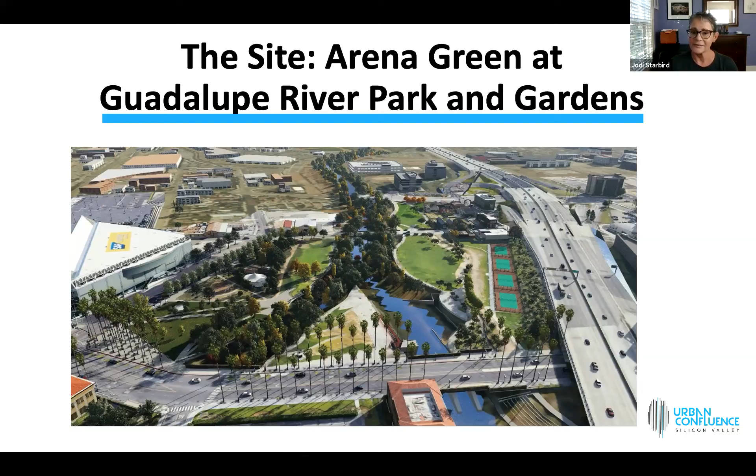As indicated here, I'm a co-founder and the board chair of the nonprofit, the San Jose Light Tower Corporation, and the Urban Confluence Silicon Valley project is a project of the nonprofit. As many of you know, we formed the nonprofit about 4 years ago. The third co-founder, Tom Woolman, is on the call. Glad to see you signed in, Tom. Steve Borkenhagen and I were the 3 co-founders, and then Christine came on board a couple of years ago.

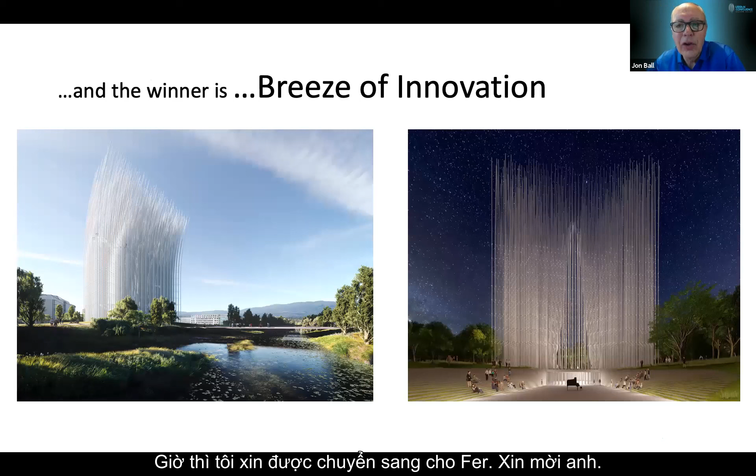So I'm going to turn it over to Fer. Fer, it's all yours. Thank you, Jon.

We are very, very happy to be in this position. We are very thankful to the organization, and thank you to the jury. It's been a long process, over a year. I'm going to introduce ourselves, our office, and then I will introduce my colleagues, Eddie Hall and Ron Klemenschik, from our executive architect and the structural engineers.

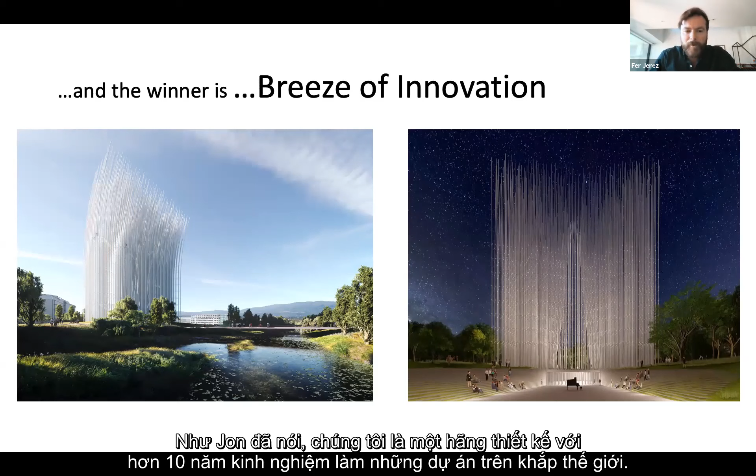As Jon has said, we are a firm with more than 10 years of experience doing projects around the world. As you can see here, we are originally from Spain. We have a few projects in Europe, we are now in Australia, and we also are working mainly in the north of Europe. So we are used to working in different climate conditions and being very sensitive with the environment.

So we are a young office, but we have experience working around the world and working remotely. As you can see, these are some of the projects we've been involved in over the last 10, 12 years. Most of these projects have been public projects, cultural venues, museums, and iconic structures, and all of them are driven by our optimism and by innovation. Why optimism? Because we think a better world is possible, and we try to use every opportunity we have for every project in any city in the world to achieve that.

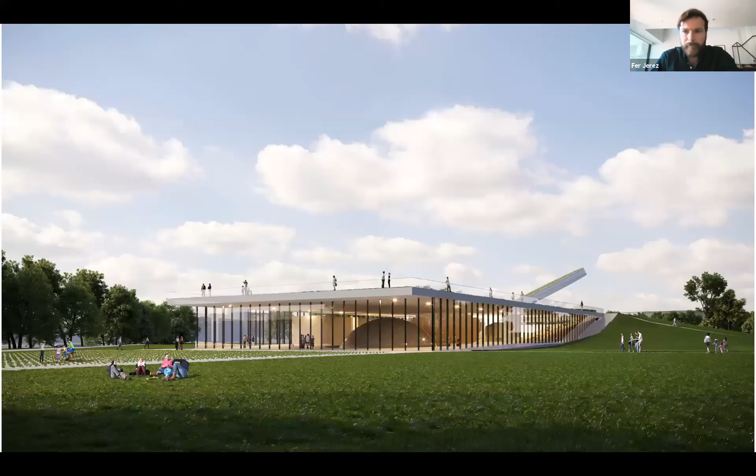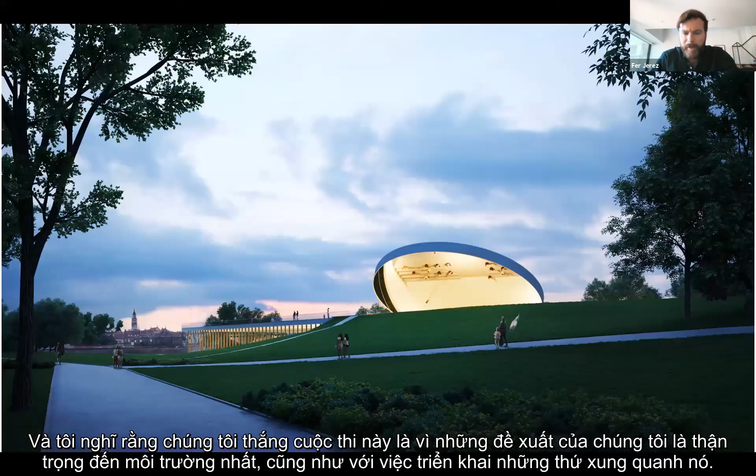This is one of the last projects we are doing that is now under construction. I'm showing this because the site is very similar to the Arena Green Park in San Jose. This is in the north of Europe. It's a park, it's a public project, it's a museum. I think we won the competition because our proposal was the most sensitive with the environment, as well as activating the context around us. As you can see, it's the old city in the background. It's a public park and an iconic structure.

In this project, we were using the same tools, similar tools, even though the project is completely different from the one we used in the Breeze of Innovation—creating an iconic structure, a landmark visible from the context, able to attract visitors, but also very sensitive with the environment and the ecosystems of the park, and able to activate the park around it. A project that is able to transform a park in a positive way, but also attract visitors from all over the country in this case.

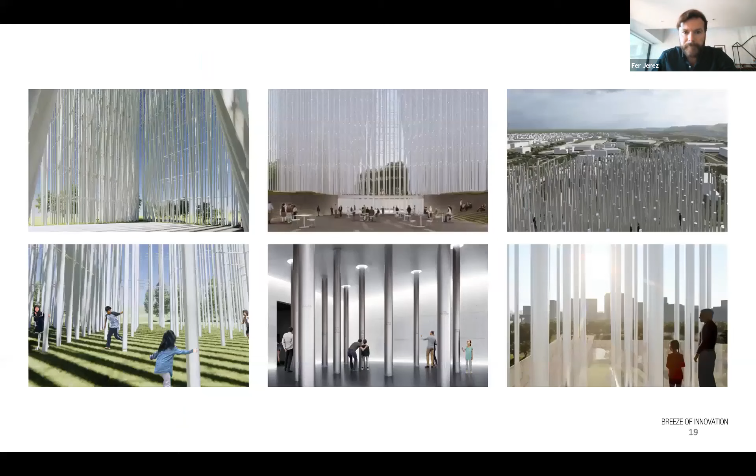So, why have we chosen to design this project? The main driver of this project has been people. We had 3 elements to play with in this project.

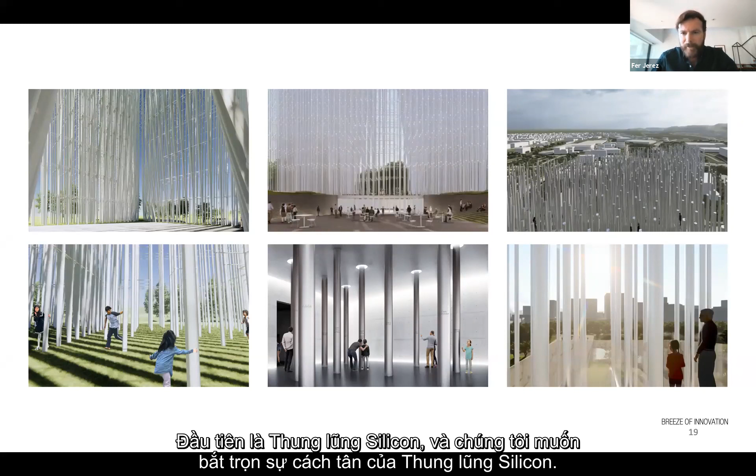The first one was Silicon Valley, and we tried to capture Silicon Valley innovation. The second one was San Jose, the city, how to engage with the community of San Jose. And the third one was the park, the environment, how to create something that sits in the park, but is almost like a forest, like it belongs to the park, not an artificial structure superimposed on the park that is totally different in shape and form from nature.

That's the reason we chose these rods, these vertical elements, with the idea that they can merge with the forest, merge with the trees, and allow children and families to enjoy the space at every time. As you can see, we have different spaces here that can be enjoyed at different times of the day.

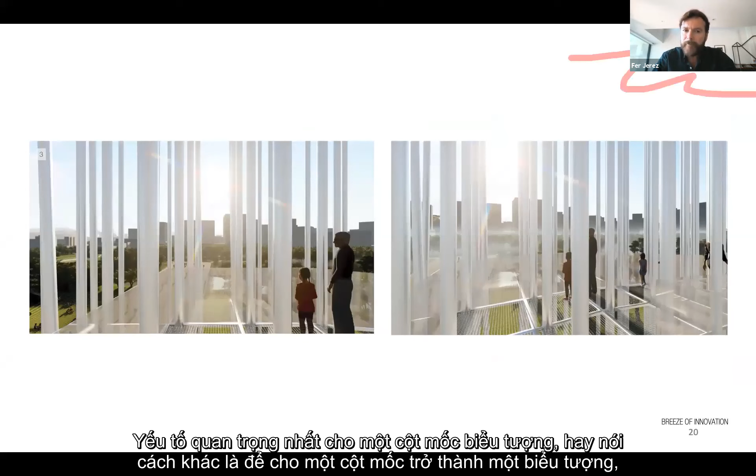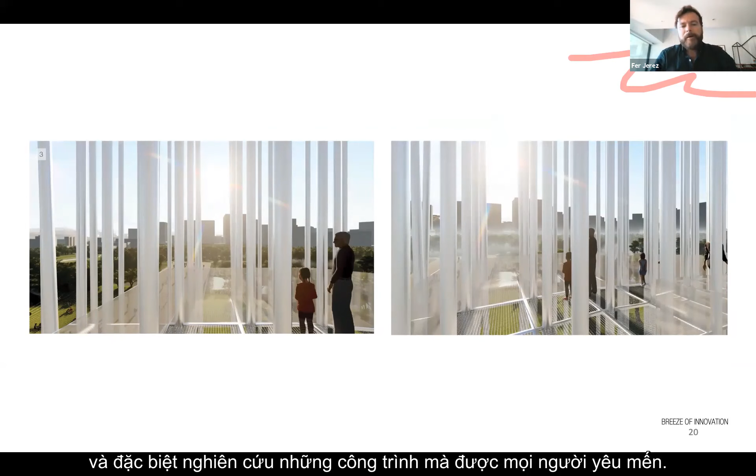But the most important element for a landmark to be truly iconic is to provide an experience that cannot be found anywhere else in the world. We've been researching a lot of iconic landmarks around the world and studied especially the ones that are really loved by people. We think that the fact that this structure will move with the breeze engages with a unique experience for people, because it will be the first time you will be able to ascend in a structure that is moving.

People will be completely safe because we have created platforms that are fixed in a fixed structure, but around them, thanks to our structural engineers, we allow the structure to move with the breeze. And more importantly, this movement will create energy.

We think this is a very important fact, because we are in the 21st century. We are all aware of climate change, we are all aware that the valley is warming up, and what better way to bring a bit of breeze as clean energy. Next, please.

Once you get to the top, this is the viewing platform, you will see this landscape of light, which in a way summarizes the concept of the project. The breeze will move these rods, and with the movement of the rods, the tip of the rods will light up, and that instant creation of clean energy we think is a very important statement for our planet.

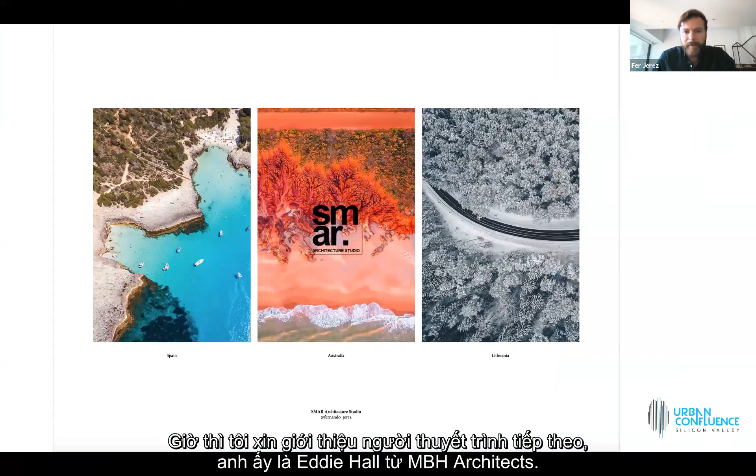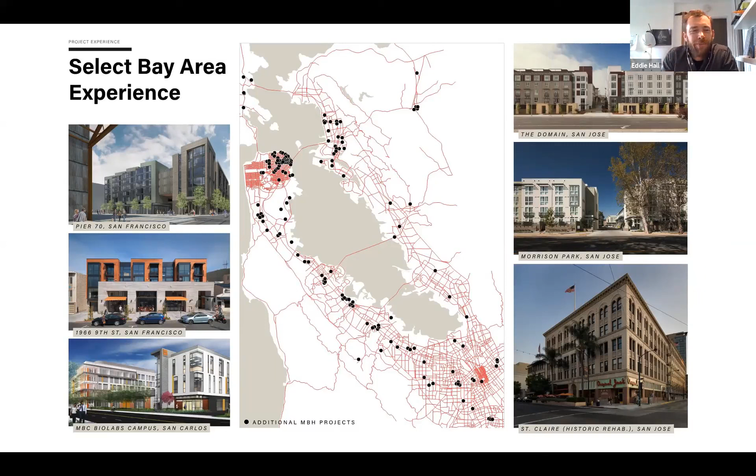Pier 70 is multifamily housing that we're currently doing, that's under construction. 1966 9th Street was recently completed, that's a multifunction building. And MBC Biolabs, we recently completed phase 1 in San Carlos that we're extremely proud of. They have since gone on to move on with and participate in COVID testing. So that really warmed our heart, as we work on projects that leave the world better than when we found it. And let's go to next slide, please, Mike.

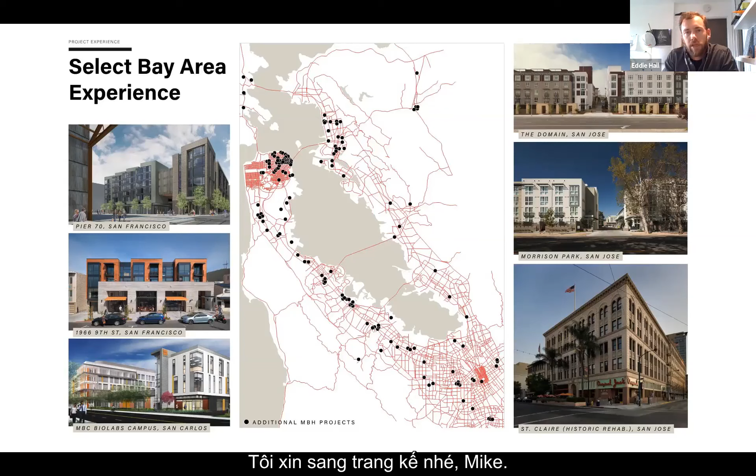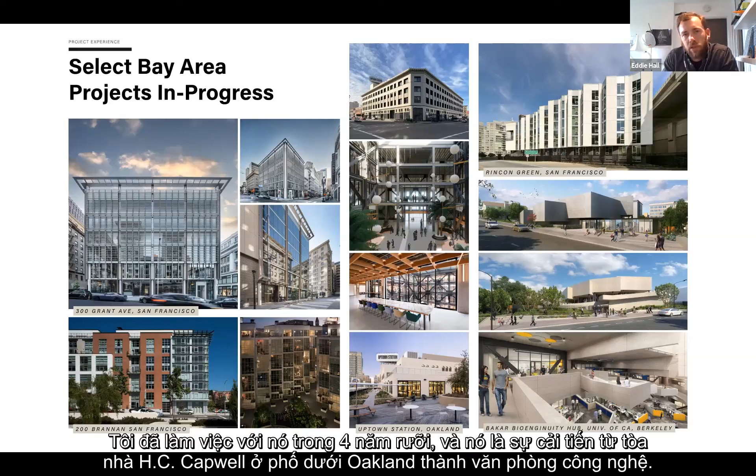The Uptown Station, near the center of the slide in that vertical column, is something that is near and dear to me. I worked on that project for 4.5 years, and that was the conversion of the old H.C. Capwell building in Oakland to a technology office. And we included a 95-foot atrium in that space, along with seismic retrofit.

And then finally, a project that we're working on that we're also very proud of is the Bakar BioEnginuity Hub, which is a really fantastic piece of 1960s brutalist architecture on the UC Berkeley campus that we are expanding and converting into a life science laboratory. So all of these projects, just to give a little bit of context and familiarity with me and my company. And I'll close with saying they all pale in comparison to the exciting and amazing designs that SMAR has and the rest of the team have developed for this. We're extremely excited to move forward with the next steps. And with that, I think we can go next slide, and I'll hand it over to Ron Klemencic.

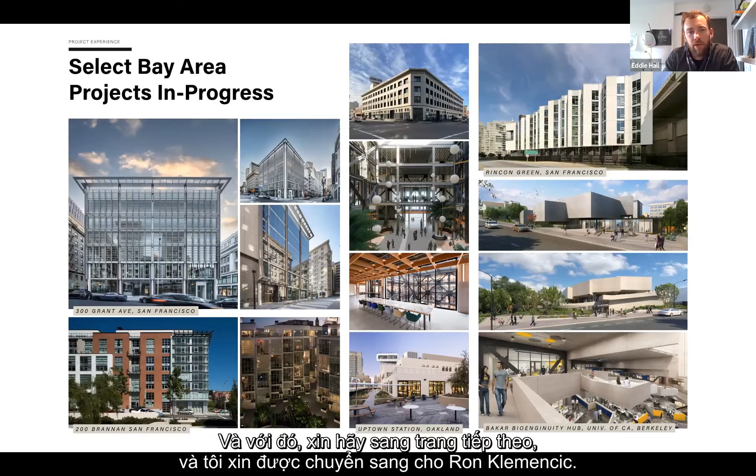Thanks, Eddie. Good evening, everyone. I can't tell you how excited I am to be part of this project. I get to work on some of the most amazing projects all around the world, and this truly is the top of my career. So I want to commend John Ball and Steve Borkenhagen and Christine Davis for running a truly world-class competition—very transparent and truly world-class in all of my career now, 35 years. So next slide, please, Mike.

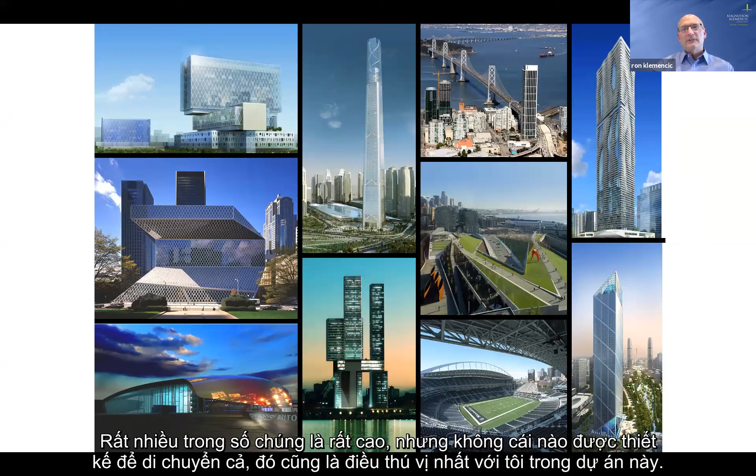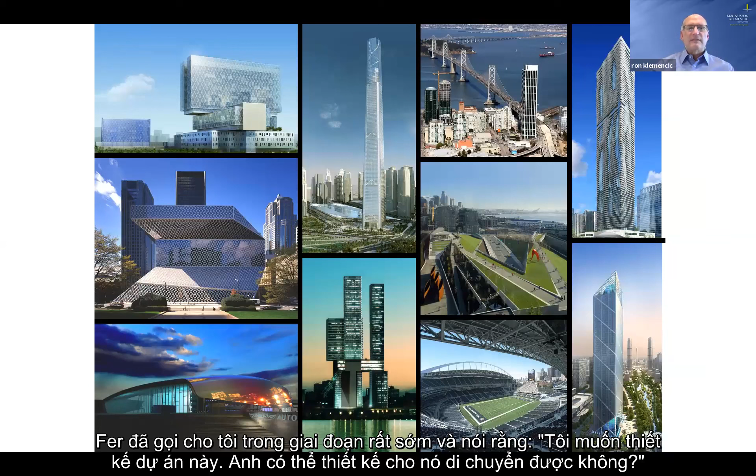Our company was founded 101 years ago. We've been around a long time. We've designed some of the most amazing buildings all around the world, in North America, in the Middle East, in Asia, many of them very tall, none of them designed to move, which is most exciting to me about this project, where Fer called me in the very early stages and said, I want to design this thing. Can you deliberately design it to move? That's super exciting for a structural engineer.

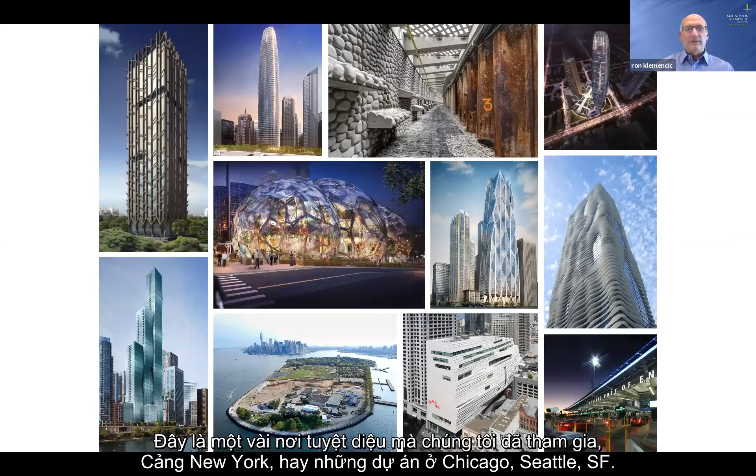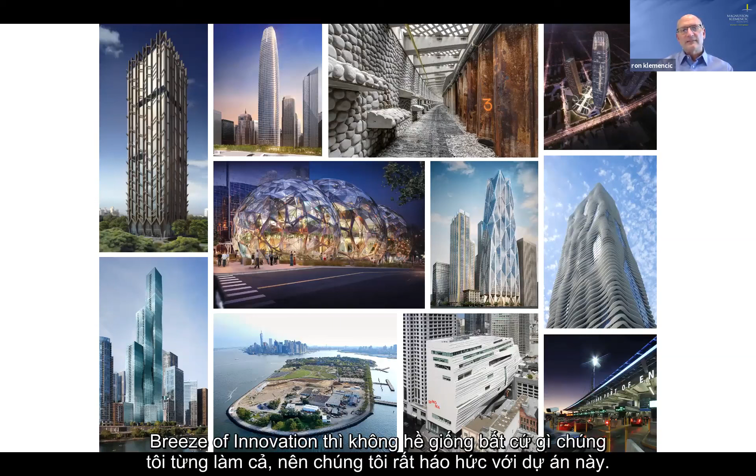Some of the amazing place making that we do around the world, whether it be in New York Harbor or in Chicago or Seattle or San Francisco. These are amazing projects to be involved in, and we're really honored to be involved in these kinds of projects. And the breeze of innovation is unlike anything we've ever done. So we're super excited to be engaged in this.

The Amazon Spheres in Seattle, which was completed about a year ago, is a never been seen before project. And this is the kind of stuff that really inspires us and challenges us, where we have clients like Urban Confluence who want to really reach and do something new, and ambitious architects who want to realize that vision. And we're able to create these never been seen before kind of iconic structures, not only for private clients, but also for public clients.

The Seattle Public Library is a great example of that, a super iconic structure funded by public money on public land, inspiring people from around the world to come and enjoy the library and see Seattle and its sights.

Or in Chicago, this very small but very iconic pavilion where we experimented with three-dimensionally bent wood, never been done before in the world. And it's one of the most photographed places in Chicago today. It's in the Lincoln Park Zoo area, in the Lincoln Park area in Chicago, if you're interested in visiting.